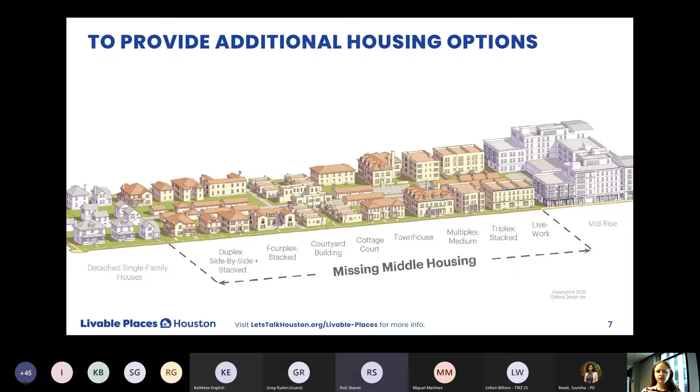Livable Places will do this while respecting and not overriding any active deed restrictions, nor interfering with minimum lot size and minimum building line ordinances.

Livable Places is all about proposing and promoting housing options where allowed by deed restrictions. These are housing types that Livable Places is trying to encourage more of or make changes to, which we'll go through individually.

Encouraging these housing types means that we need to reduce parking requirements near high-frequency transit and high-comfort bike facilities to make building these housing types more affordable. This only means that the city won't require parking minimums near transit-served areas.

People will be allowed to provide parking based on their needs. For those in the growing demographic in Houston of one car or no car households, this allows for an option in the market in which they can choose not to have to pay for land that can be utilized by

something other than pavement when there are transit options available. By easing parking restrictions in some of these targeted areas, a more diverse style of housing can be built that can be more affordable, promote more social interaction within the community, and help encourage use of our available multimodal transit investments.

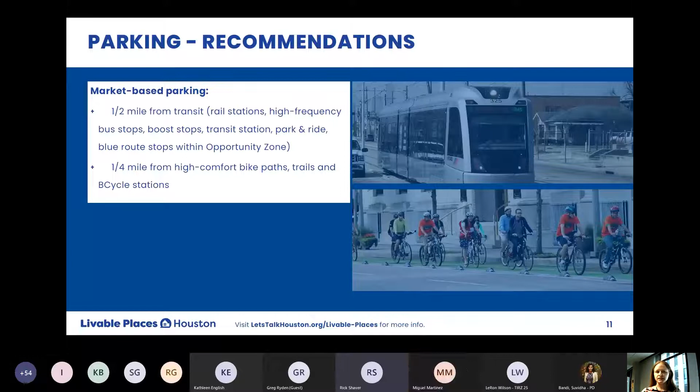A second dwelling unit is an additional dwelling unit on a single-family lot that's located above a garage or within a separate structure from the main house, also called accessory dwelling units, granny flats, garage apartments, etc.

This type of development is currently allowed in Houston and is popular for those who want to add rental income onto their property while remaining on site, or to have 2 rental units on a single lot, fitting easily into the existing neighborhood scale. Current rules allow 2 dwelling units sharing 1 lot to be classified as single-family residential.

For the current rules, if proposing a duplex, there is no cap on either unit size, and if proposing a detached second unit, the ordinance limits one of the unit sizes to not more than 900 square feet. Why should those be treated differently?

The proposed change would eliminate the maximum size of a second dwelling unit, so there wouldn't be a difference between attached and detached for the unit size.

Likewise, currently the ordinance requires the first home to provide 2 off-street parking spaces and the second detached unit to provide 1 additional space, or if a duplex, 2 parking spaces per unit.

We are proposing that the parking requirements for the units be tied to the unit size instead of a one-size-fits-all approach. The minimum parking requirements for the first structure would be 1 space for a unit that is 1,500 square feet or less, and for units greater than 1,500 square feet, 2 spaces.

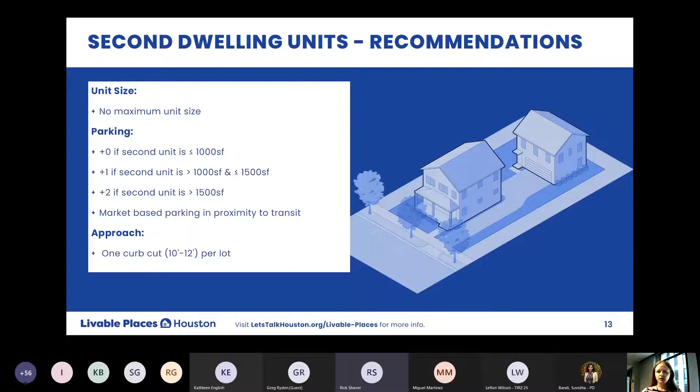In conjunction with encouraging more second dwelling units, the Planning Department was awarded an AARP grant to provide funding for an ADU design competition, which was held late last year to encourage construction of ADUs throughout the city. Submitted plans are now published in a book, and residents are able to use the designs to help in the permitting process for their own ADU.

You can download a free copy on our website or request a hard copy for a minimal fee to cover printing and shipping. This ADU design book has won 2 Best Practices Gold Awards from APA Texas chapter and APA Texas Houston section.

Narrow lot development is a single-family home located on a narrow lot that fronts a street. Narrow lots could also develop with a shared driveway or flag lot configuration. Neighborhoods across the city are seeing these types of housing as existing lots subdivide into narrow front-loading lots with direct vehicular access from the street via very wide driveways.

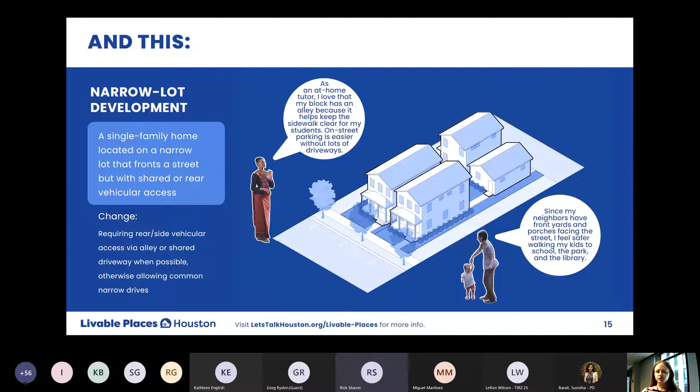The ordinance change we are proposing is to require vehicular access via alley or shared driveway when possible. These are some of the types of development that can occur on narrow lots.

The primary goals of promoting rear or shared vehicular access on narrow lots are to increase pedestrian safety, preserve on-street parking, and reduce the impact to the stormwater detention in the public right-of-way by eliminating or reducing the number of driveway curb cuts, a source of vehicle, pedestrian, or cyclist conflict, and continual and repeated breaks in our open ditch streets with smaller capacity culverts. The space between driveways is sometimes only 6 to 8 feet, which isn't enough room for anything.

Just like the second dwelling unit type just discussed, these are eligible for the parking requirements to be based on the unit size: a minimum of 1 space for units 1,500 square feet or less, or 2 spaces for units greater than 1,500 square feet.

The narrow lot recommendations are separated into 5 categories based on access, lot width, and the overall site size when proposing a subdivision of land. This table is helpful for the following slides.

On the Let's Talk Houston website, you can download the narrow lot development details available in both tabular and flowchart styles. So depending on the lot width, the cutoff being 40 feet, or the proposed subdivision size, cutoff is 10,000 square feet for lots with frontage on 2 streets, either corner or front and rear, or 15,000 square feet for all other lots, will determine the type of vehicular access permitted.

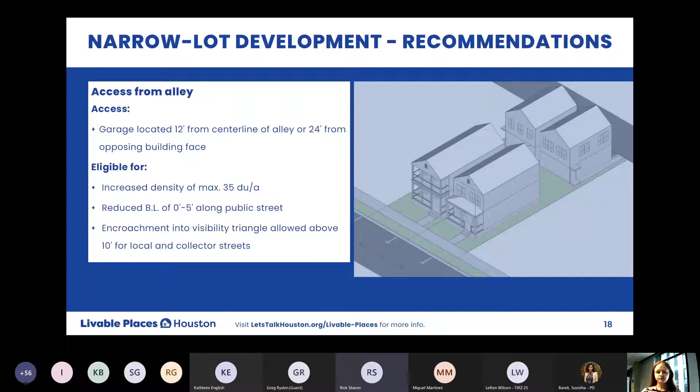When not taking access from an alley, with lots with a width less than 40 feet and with a total subdivision size of greater than 15,000 square feet, or 10,000 square feet on lots with 2 frontages on public streets, vehicular access must be provided by either shared driveway, flag lot, or PAE, a permanent access easement, which is a type of private street with a width of 28 feet. Driveways from the lots to the public street would not be permitted, only shared access.

For side or rear loading lots, units along the public street should front the street with doors and provide pedestrian connections to the sidewalk. The incentives for this type of development are the same as for the alley access development.

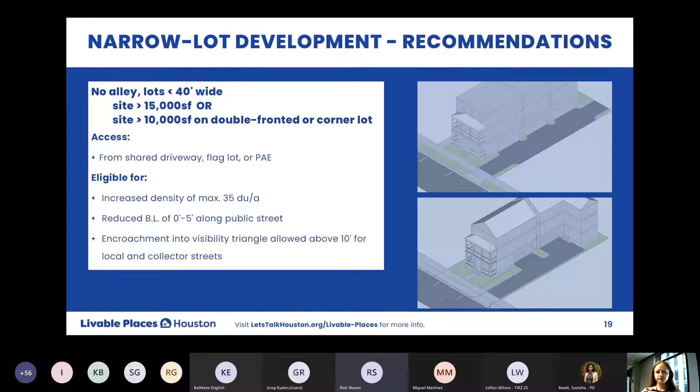When not taking access from an alley, with lots with a width less than 40 feet and with a total subdivision size of less than or equal to 15,000 square feet, vehicular access must be provided by either shared driveway, flag lot, or PAE, just like the previous, or by a common drive between two lots.

The additional incentives of increased density and reduced building line are only available when choosing the shared access developments. A common drive is one driveway approach at the street shared between two front-loading lots. The common drive approach is a maximum 24 feet, 12 feet for each lot. The driveway, once within private property, can separate and flare into two separate driveways or remain combined.

If the subdivision is 3 lots, then 2 of the lots will be required to have a common drive while the third has its own.

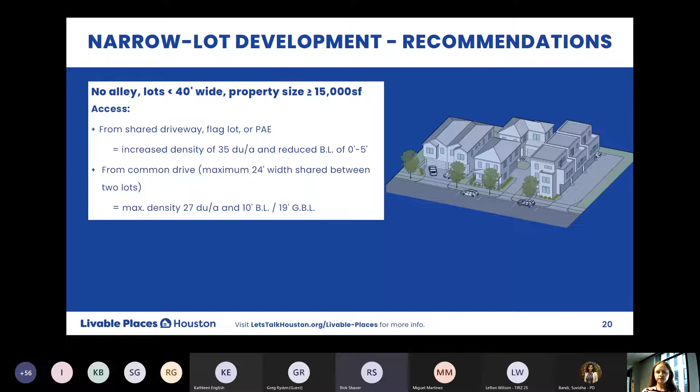The last category of narrow lots are for lots greater than 40 feet in width that are not capable of rear or side access. These lots are permitted individual driveway approaches as long as there is at least 22 feet of uninterrupted curb space to allow for on-street parking if 1/3 of the structure facing the street is habitable space, i.e. not just a garage door as the ground floor facade. The primary structure can have a setback of 10 feet, while the garage or carport face must be at least 19 feet from the right-of-way.

I know this is a lot of information that bleeds together all at once, but like I said, a flowchart is available online in addition to the full housing recommendations from the Action Committee. And of course, if there are questions, please ask.

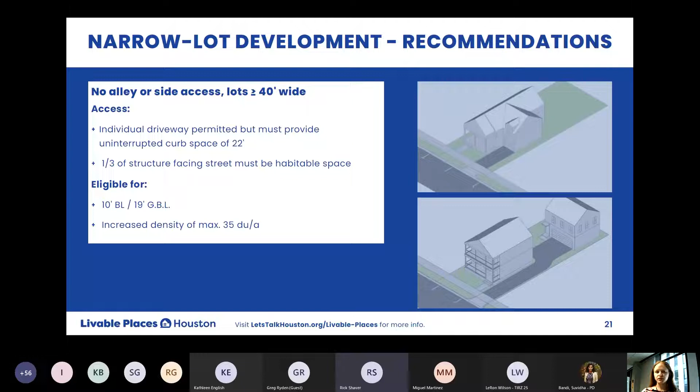Moving on to the next type, courtyard-style development is a cluster of single-family homes located around a privately managed shared courtyard, sometimes called a pocket neighborhood. Our current development rules do not permit this style of development, but it is increasingly in demand in many cities throughout the country. This is a fee simple type of development.

There would be no minimum lot size or width and no maximum density. This style is perfectly catered to smaller homes. Lots do not have to have frontage on a public street, private street, or shared driveway, which the current ordinance requires.

Instead, lots can have sole frontage along the courtyard. The courtyard space can be one conglomerated piece or separated and spread around the development as long as the minimum size of each courtyard is maintained for usability among residents, a minimum of 12 feet wide and 480 square feet in area, with at least 20 feet between structures facing the courtyard.

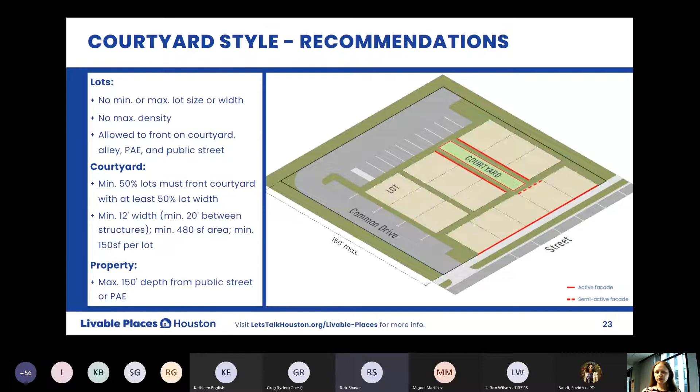Based on the number of lots is how to determine the minimum size beyond that base minimum, at 150 square feet per lot. Also, at least half of the lots within the subdivision needs to have frontage along the courtyard, or a courtyard. The maximum property depth of 150 feet from a public street is in place by the Fire Marshal Office request. If the subdivision has multiple street frontages, then the 150 feet depth is from each street face.

A reduced building line of 5 feet along the local street is permitted, and the homes are required to provide an active facade onto the courtyard and/or street by way of doors, windows, porches, etc., with a direct pedestrian connection. The maximum height restriction of 30 feet is to keep the development to a neighborhood scale.

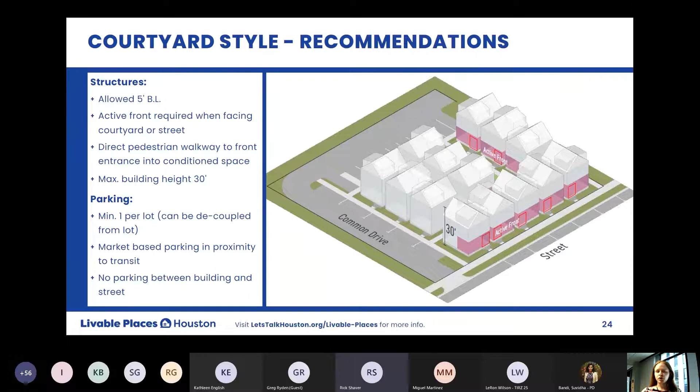This development type has a minimum of 1 parking space per lot and will allow the option to have the parking be within a common parking area decoupled from the lot. Parking is not permitted between the structures and the street.

This slide is a helpful way to graphically show what I just walked through, and it also shows that the courtyard style development can be in any configuration and size, from a subdivision of a single existing lot to multiple lots or an entire block, with endless site planning possibilities.

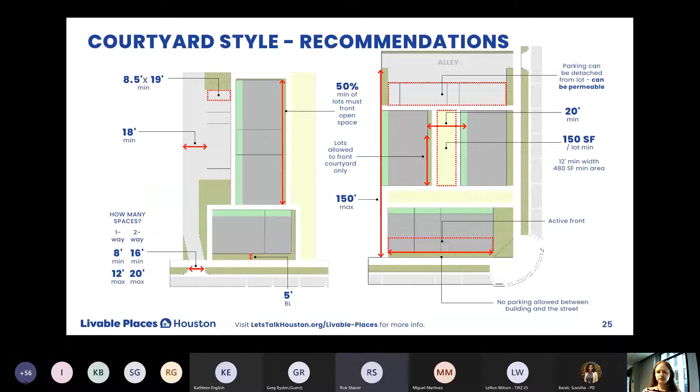The final type is multi-unit residential, or MUR, a triplex, multiple duplexes, a fourplex, or multiplex with no more than 8 dwelling units in whatever configuration. This development type would reintroduce triplexes and quadplexes that were popular in Houston around the mid-century, such as in Montrose.

Over time, our development rules have made constructing these types of housing more cumbersome or infeasible. We hope that this could reintroduce small-scale multifamily housing in Houston and provide additional rental housing on the market.

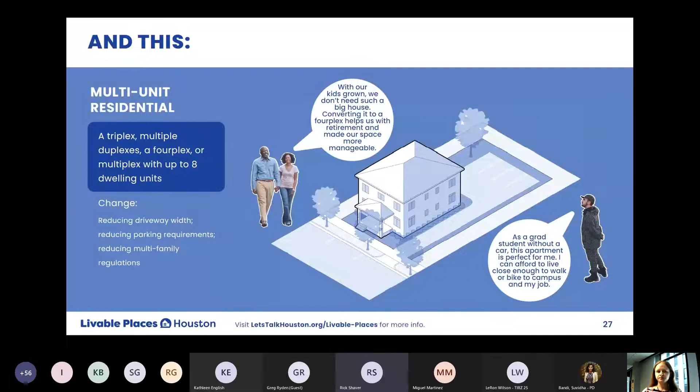Per the current ordinance, when a property has more than 2 dwelling units, it is classified as multifamily, with no differentiation between small-scale multifamily housing and high-rise or garden-style apartments of more than 100 units. We are proposing to create a separate classification called MUR for properties with only 3 to 8 dwelling units.

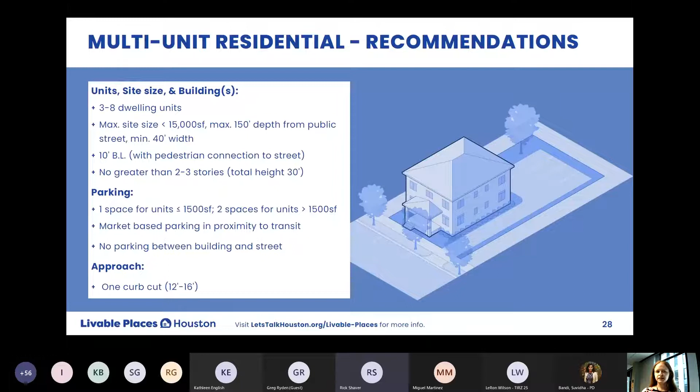The site size should not be greater than 15,000 square feet and have at least 40 feet in width. Like the courtyard style, there is a maximum property depth of 150 feet from the street and a building height of 30 feet. Like the second dwelling unit and narrow lot types previously discussed, we also propose that the minimum parking requirements be based on unit size: 1 space for units 1,500 square feet or less, and 2 spaces for units greater than 1,500. The objective of this new multifamily designation is to allow for right-sized standards that will encourage density safely within the residential scale.

This is an example of many configurations possible, such as older style quadplexes, groupings of duplexes, a triplex with garage apartments, 8 single-family rental homes, or whatever the site and the market determines, up to 8 units.

In addition to the proposed ordinance changes, we are continuing to work with Public Works so that other development code changes related to these proposals will all go together to be enacted simultaneously and not conflict with each other.

The amendment to the current development code is being written right now based on the work of the Livable Places Action Committee, user comments and suggestions on Let's Talk Houston, and the many community presentations and engagement we have completed. We're still taking input, so it's not too late to share your thoughts. Please visit Livable Places on Let's Talk Houston to get detailed information on the Action Committee's recommendations as discussed here and to provide your feedback.

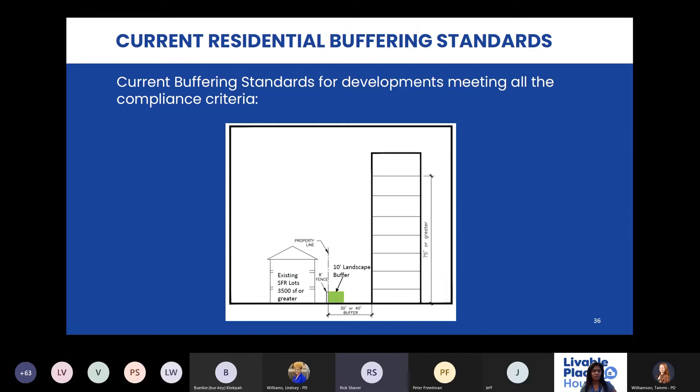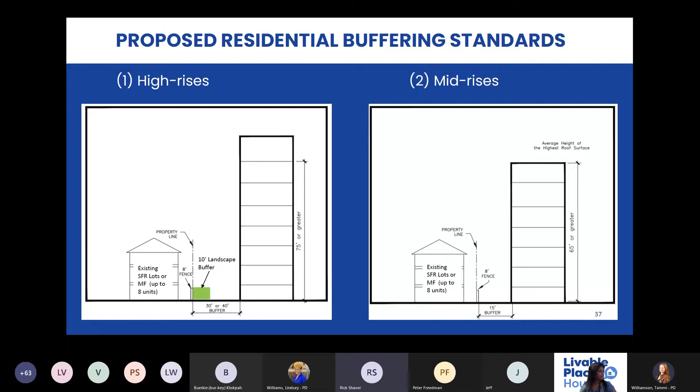In the next slide, we're going to talk about garage screening, which is the second topic.

The purpose of this amendment is to protect all residential developments from light that comes from car headlights and also light that comes from garage ceiling lights.

As part of the amendments, all parking garage faces that abut residential development or are across the street from residential development must provide an exterior cover of 50 inches for all tiers where parking occurs. We also introduced additional requirements for parking garage structures when they abut a public street or existing residential development so that no light trespass is created.

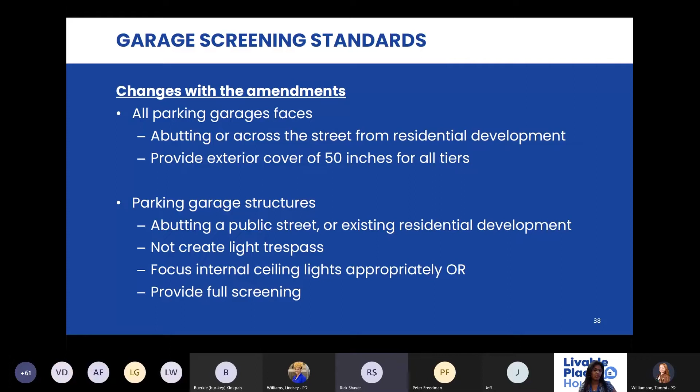For the internal garage ceiling lights, there are two options: either focus all internal ceiling lights appropriately and provide a photometric plan, or provide full screening for the garages. Next slide, please. Here is an illustration.

You can see the current garage screening requirement showing a 42 inch opaque screen. This is only required if it is abutting single family residential, and the single family residential must be located within 30 feet. The screening material is not required at 50 feet or higher.

In the right side illustration, you can see the proposed change where the opaque screening is 50 inches and is required on all faces abutting residential development or when there is residential across the street. There is no longer a 30 foot distance requirement between the homes and the garage structure.

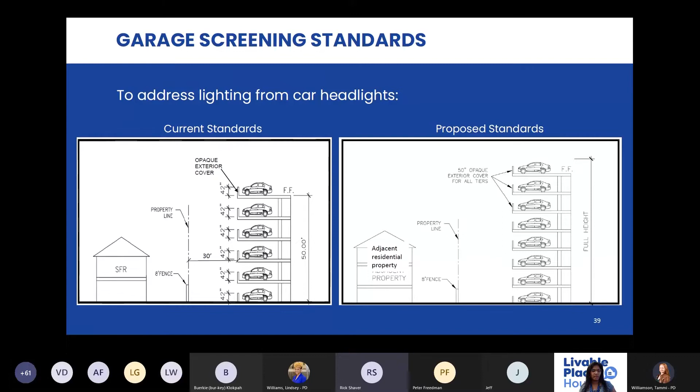Next slide, please. On this slide, you can see two images showing the garage screening requirements. On the left, you can see one structure with full screening versus another with only the opaque exterior cover of 42 inches.

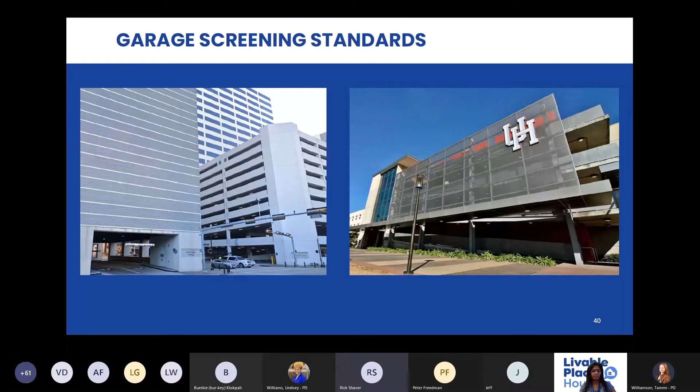On the right side image, you can see one structure which has both types of screening - the opaque exterior cover of 42 inches, but it also has full screening. This just gives you a glimpse of what it will look like with full screening versus the opaque exterior cover. Next slide, please.

Now, the third item is lighting fixture standards. The purpose of this amendment is to minimize light trespass and keep direct light from shining onto abutting residential properties or public streets. As part of the change, we're recommending that all outdoor fixtures, be it wall-mounted or pole-mounted on commercial developments, when abutting residential development or abutting a street, must be fully enclosed in the fixture housing. They must not create light trespass more than 0.2 foot candles when measured at grade on the property line.

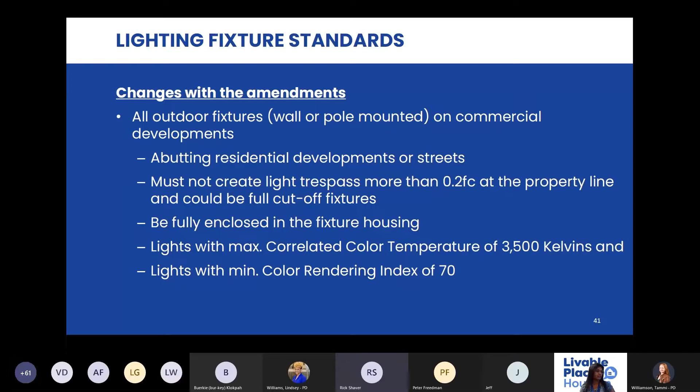They could be full cutoff fixtures. The lights must have a maximum correlated color temperature of 3500 Kelvin and a minimum color rendering index of 70. So these are specifications for the fixtures. Next slide.

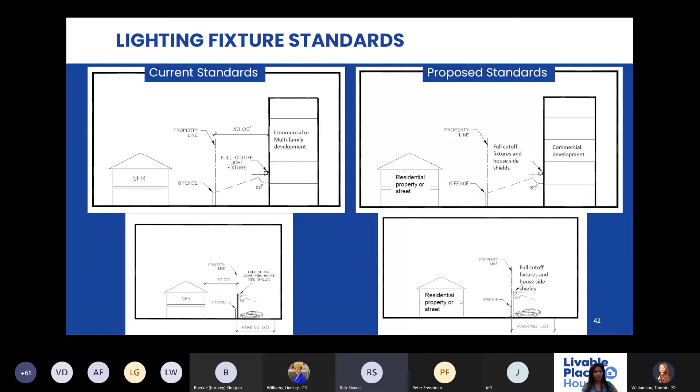Here is an illustration of the current standards and the proposed change. You can see how we recommended that the 30 feet distance requirement be removed, and all of the wall mounted fixtures, even though they're further than 30 feet from residential developments, they still have to make sure there is no light trespass more than 0.2 foot candles measured at the property line. Next slide, please.

Here is an example image. On the left side, you can see that there is parking lot lights that are shining right next to the bedroom windows, versus the image to the right, which shows the lights focused downwards. Those are full cutoff lights, and that's the kind of lighting we're talking about: the light has to be focused downwards so that the area needed to be lit is lit, but it should not spread across the property line to shine on the abutting residential developments. Next slide, please.

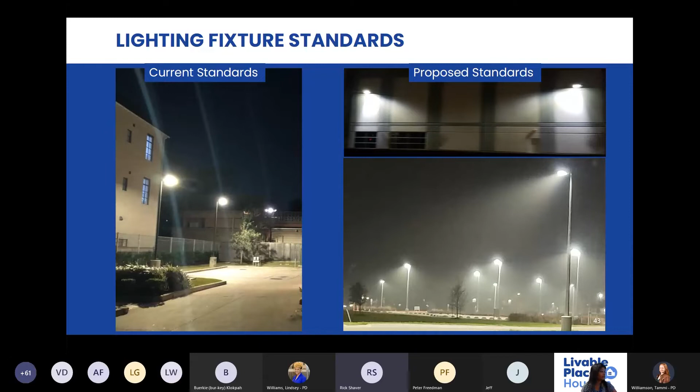Okay, so the last topic is bulk container screening standards. The purpose of this amendment is to protect all residential developments from the view of bulk containers and to improve the view along all public streets. The change is that we are requiring screening for all bulk containers when they are adjacent to residential development or when they are adjacent to all public streets.

However, we propose that along all public streets, if bulk containers are located, they must be screened. So that's the change.

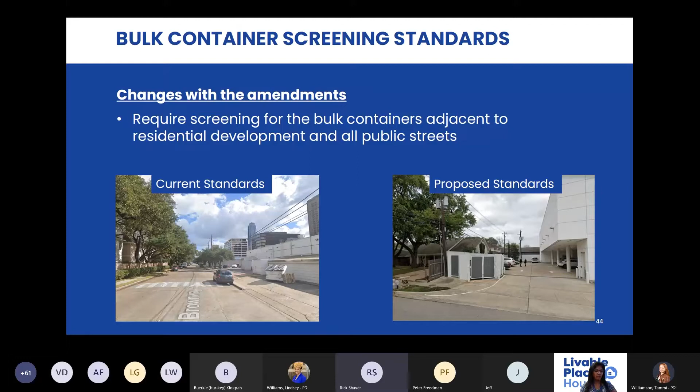With that, I just wanted to mention our timing on the buffering ordinance. The buffering ordinance changes will go to the Planning Commission for a vote on December 1st, and they will be presented to the Council Committee on December 13th, and then off we go to the City Council end of December.